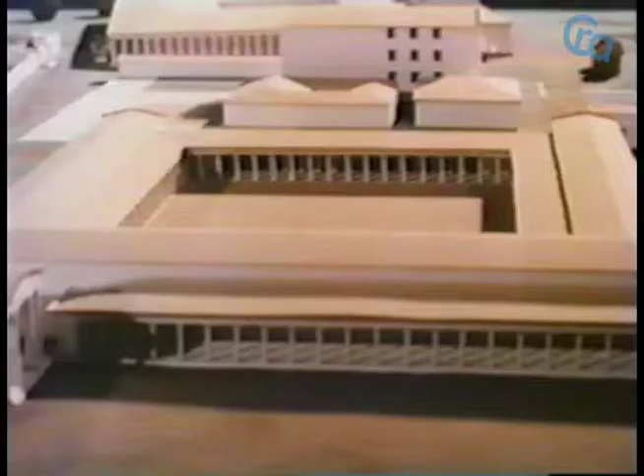But surrounded by the later richly constructed and reconstructed buildings, visitors' lodgings, administrative offices, training quarters for athletes, and the covered tracks of the gymnasium, the marble-roofed temple of Zeus always dominated the scene.

Next to it, with a low-tiled roof, stretched out the ancient, honored temple of Hera. The temple of Zeus is the norm of the Doric form, a model in measurement and all other respects for what was to follow.

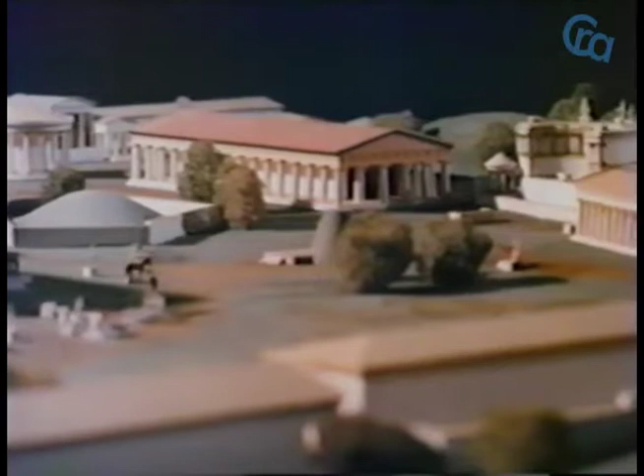The temple of Hera, a century and a half older, had been gradually transformed from a wooden building to one of stone. We must visualize the walls of what is known as the cella, that is, the inner chamber of the temple, as a half-timbered construction fitted with mud brick on a foundation of stone.

Originally, the roof supports and beams were of wood, and so were the columns, only replaced one by one as necessity or tradition demanded by columns of stone. The columns of the Hera temple were about 20 feet high. Those of the Zeus temple near 40.

The platform of the temple, the three great steps leading up to it, the capitals with their supporting slab, the lion-headed water spouts of marble, all speak to us even now with a concentrated power that must have moved the worshippers of that time.

The front of the temple, with its six columns, proclaims classical order. Behind the facade stands the entrance to the cella, the home of the statue of the god, a seated, wood-carved figure covered with ivory and gold, looming 40 feet high, filling the area with majesty.

It ranked as one of the Seven Wonders of the World, although later objections were raised that the god would have lifted the roof off if he had decided to rise from his throne. All that remains is his picture on ancient coins, a truly godlike head.

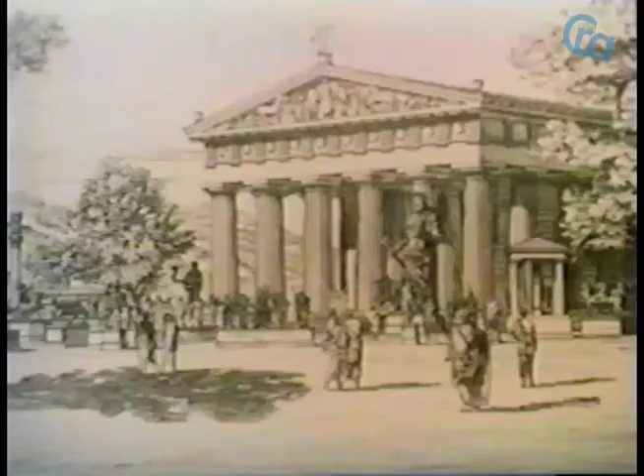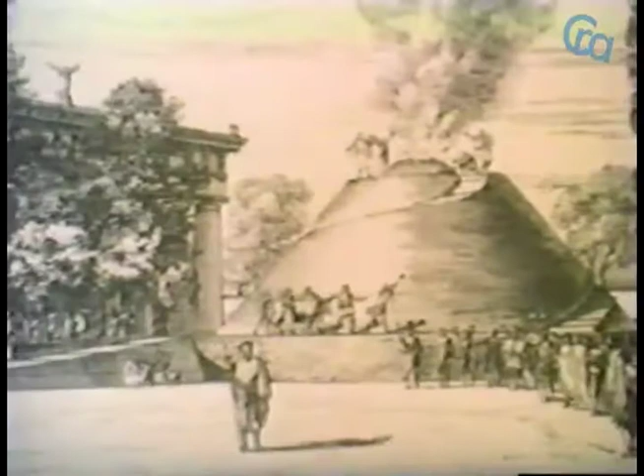There were many other statues in front of the temple. Pausanias busily counted 24 bronze statues of Zeus alone. He tells us also of an altar outside the temple, a mountain created from the ashes of burnt offerings, growing higher and higher through the centuries.

The altar belonged to the temple, but since all sacrificial acts took place under the open sky, the temple itself contained nothing but the shrine of the god.

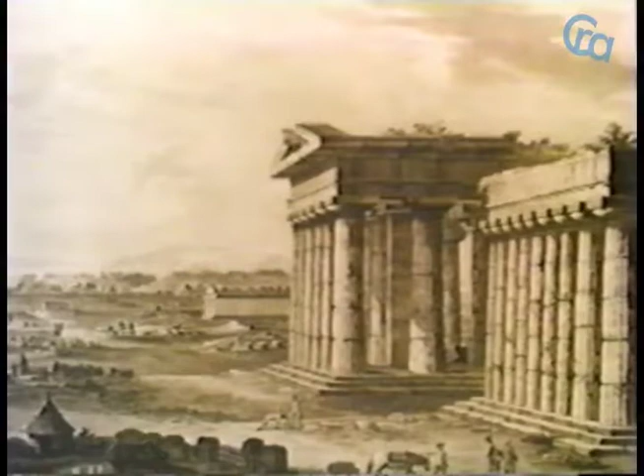Naples, 23rd March, 1787. Goethe wrote in the diary of his Italian journey: "We had been uncertain whether our journey would take us through rocks or ruins, when at last some long rectangular masses we had already noticed from afar revealed themselves as the remains of temples."

For centuries, the temples at Paestum had been lost to all knowledge in a marshy, malaria-infested, scrub-covered coastal plain. They were discovered in the middle of the 18th century when the road to the south was constructed, just at the right time when interest in archaeology was becoming fashionable.

While Goethe's traveling companion, the painter Kniep, immediately took to his sketchbook, Goethe wondered about the ruins. To him, the blunt, thickly set mass of columns appeared terrifying. It took him some time to bring his concept of classicism to terms with what he actually saw.

The romantic awareness of beauty in ruins, the sense of discovery, the enthusiastic copying of Greek art in Goethe's time, or our modern subjective photographic vision, neither can bring us close to what the Greeks saw as they stood before their temples, unless we stand there ourselves, perhaps, leaving preconceptions behind us.

The Temple of Hera in Paestum expresses the Doric temple in its classical development. Its ruins are better preserved than others, and in them we can read the canon of Doric form. Three steps alone, not scaled to the measure of a human stride, form the substructure from which the columns rise.

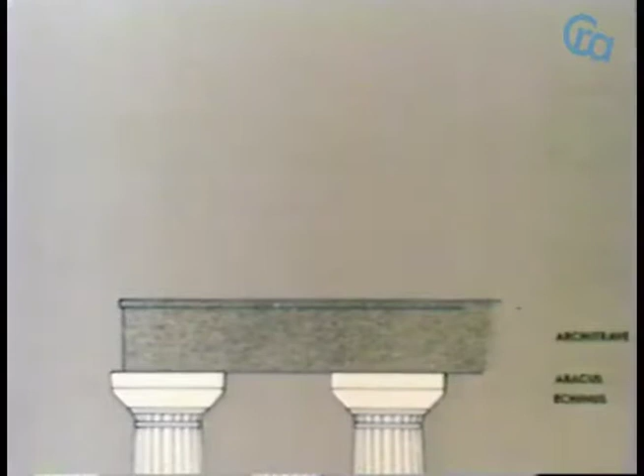Above it, there's a second layer of a row of triglyphs, that is, blocks with triple vertical grooves. One of these is placed centrally above each column, another halfway between. The intervals between the triglyphs form roughly square fields, the metopes. Thus, the interval between two columns is cut in half by the triglyphs, and the rhythm is doubled, and paradoxically shortened.

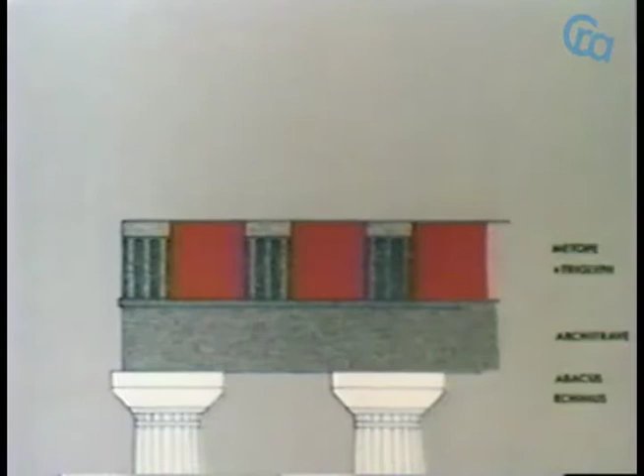The cornice, the projecting ledge of the sloping roof, carries underneath a series of blocks, the mutules, which again have the intervals between column, triglyph, column. Thus, to each interval between the columns below, there are four intervals above. The rhythm is speeded up once again.

These blocks beneath the cornice, the mutules, and the projections underneath the triglyphs are studded with cylindrical pegs, the guttae. They presumably imitate the wooden pegs used in carpentry when temples were built of wood.

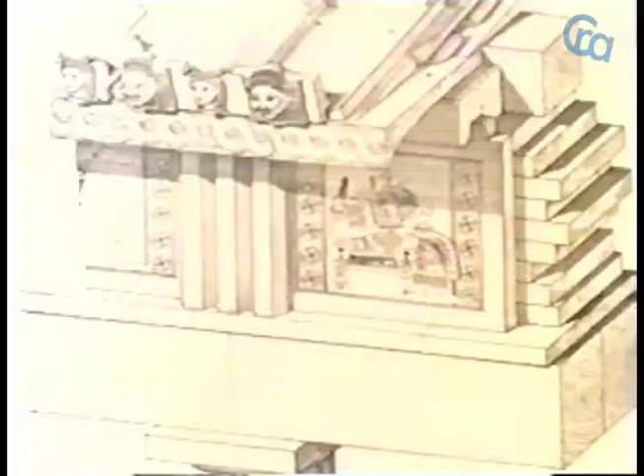Vitruvius, in his book on architecture, derived many details of form in the Greek temple from the earlier constructions of wood. He considers the alternation of triglyph and metope in the Doric temple to be a result of the earlier structure of wooden beams, with gaps or eyes between them. These open eyes were eventually blocked in with panels, the metopes, which carried pictorial decoration, while the beam ends were covered with carved panels, the three-grooved triglyphs.

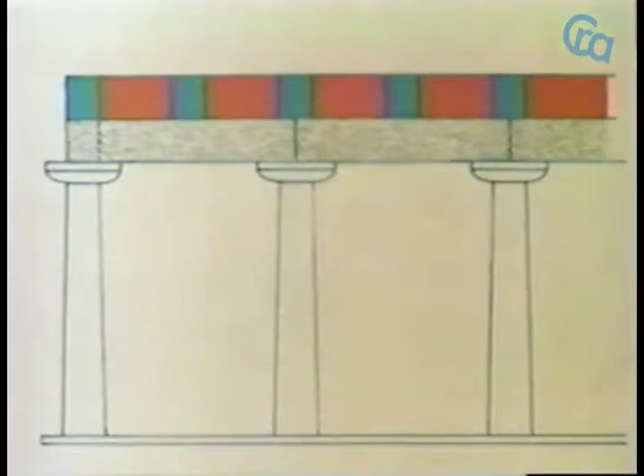When temples came to be built of stone, nothing structural corresponded anymore to triglyph and metope. They became decoration. But this tenacious adherence to traditional form, originally religious in nature, brought with it architectural complications at the corners of the temple. A triglyph had to be set at each corner of the entablature. It offered a visual termination and had been a structural necessity when the temple was made of wood, for the triglyph then marked the head of the beam, coming in at each corner at right angles.

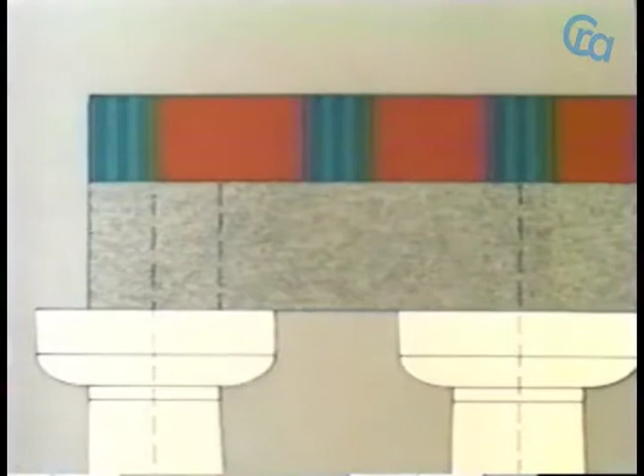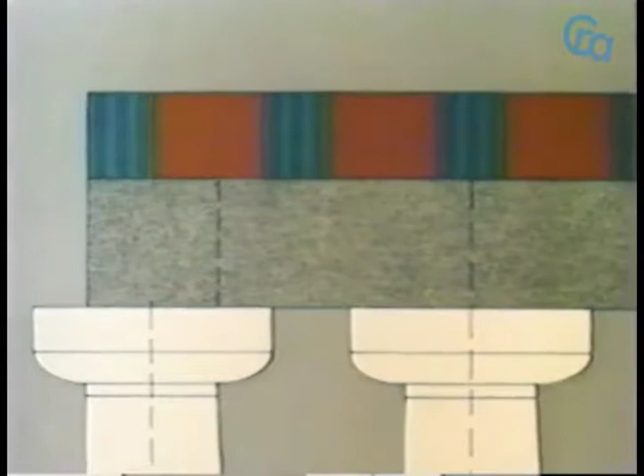But the pattern of horizontal metope and vertical triglyph, when applied to stone, which has a broader construction than wood, left only part of the metope at the corner, a condition which was plainly intolerable and had to be straightened out. This could be done either by making the corner metopes broader, or by shortening the interval between the columns at the corner. There were many possible variations between these extremes, and the problem was solved by each architect in his own way.

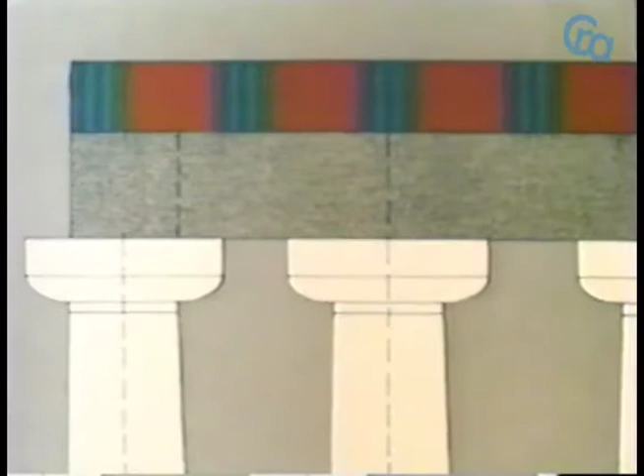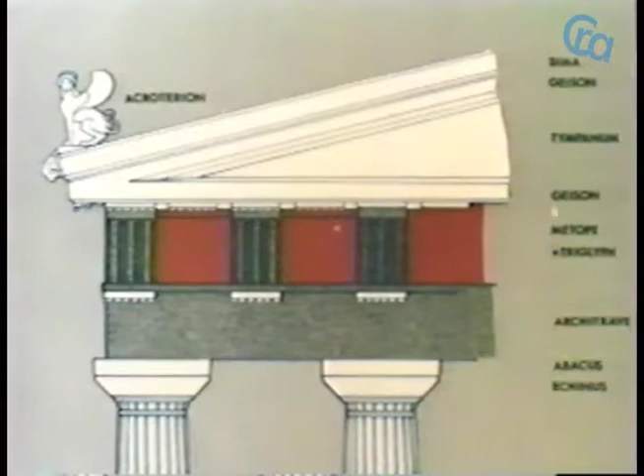The top of the temple consisted of the pediment, its raking cornices, and the guttering or the sima, formerly called the cyma. The Temple of Hera has lost its cyma and also the figural decoration, which explains why the roof seems flat and rather squat. We must think of it as having been luxuriantly ornamented, as a crown to the whole building. The vertical open screen of the colonnade is contained between the strong horizontal lines of substructure below and entablature above.

At Paestum, as at Olympia, next to the developed classical temple, an earlier one stands, or rather sprawls, with 18 columns at the side and 9 in the front. Even if, in our imagination, we restored the cella, the inner chamber of the temple whose stone blocks were stolen and used for other neighboring buildings, there remains with us an impression of spreading heaviness, a lack of concentrated tension.

The ancestors of these columns were tree trunks. It's easy to believe that from a distance they appear quite slender, but under their immediate shadow we sense a brooding massiveness. The column shaft stands on a broad surface. Under the load of the superstructure, it swells like a muscled arm. The curve of the capital appears to bulge between the column shaft below and the square abacus above. The heavy burden is drastically, naively evident.

The decorative border between shaft and capital is carved with incredible delicacy compared to the brute force expressed by the columns, a bracelet with ever-changing ornamentation.

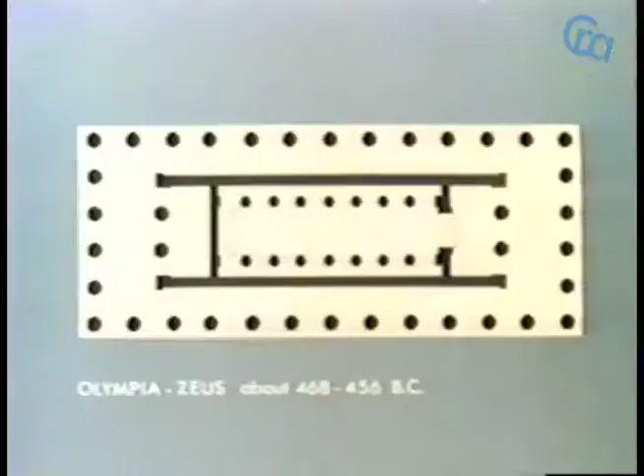A series of carved rings is the only decoration of the classic Doric capital. The columns are now so closely set against each other that the abaci practically touch and give the illusion of a continuous wall. The Temple of Zeus at Olympia is structured according to the classic plan, in harmonious design, visible from all sides, each dimension in proportion to all others. The ground plan is basically that of the Hera Temple at Paestum, and the architectural variables are naturally similar.

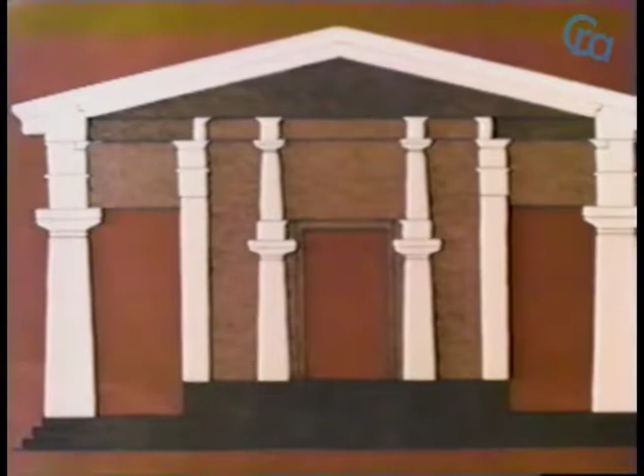The Doric column, for example, cannot be arbitrarily stretched or shortened. The colonnade of the cella must therefore be constructed in two stories. The two rows of columns are erected in proportion to each other in size and in the number of flutes, the lower colonnade twenty, the upper sixteen, so that the upper colonnade naturally continues the tapering of the lower one without losing its entasis, that is, the gentle swelling of the shaft, which gives individual movement to each column.

Horizontal forms in the classic temples always show a subtle swelling. The verticals incline inward. The tension created by these tiny deviations from the straight line, giving life and movement to the whole building, is hardly visible to the eye. Measurement alone proves its existence.

The transition from the archaic to the classic temple can be compared to contemporary development in Greek sculpture. We can see that this archaic boy has his weight naively, rigidly poised on both legs. The later classic concept is counterpoise. The hips tilt up to the downturned shoulders, an interplay of movement and counter-movement, giving to the body, calm and relaxed to all outward appearance, an inner tension communicating itself to every limb.

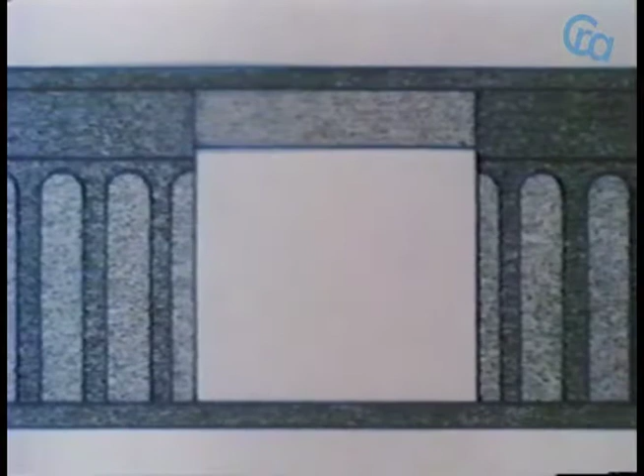The pediment had no observable function as a load carrier, nor had the metopes between the triglyphs. They were just panels covering an empty space, and they were used in Doric architecture for pictorial decoration. The earliest temples had painted metopes of fired terracotta.

A plaque from the Apollo temple at Thermos shows Perseus, who had slain the Gorgon Medusa and is running away from her sisters. He has hidden the Gorgon's head in a satchel to escape its dreaded gaze. The artist chose it peeping out.

The earliest metopes of stone are found on archaic buildings in Selinus and Paestum in the middle of the 6th century BC. The metope, like the triangular space of the pediment, presents a challenge to the artist. Here, Europa is carried off by the bull. The scene has to fit the rectangular, almost square frame and fill it.

The deeds of Hercules and other heroes are well suited for a sequence of metopes. Hercules seizes the tripod of the Delphic priestess. Each story is complete in itself. Hercules brings the Erymanthian boar to King Eurystheus. The king hides in the Pythos, a storage vat.

Hercules versus the giant Antaios. The Cercopes were twin pygmies, well-known cheats and swindlers. Hercules caught them disguised as bluebottles, spoiling his sleep. He hung them like meat from a pole. We meet this story in Paestum and a little later in Selinus. The twins, seeing Hercules from an unusual viewpoint, make indelicate jokes about his hairy bottom. Hercules laughs and lets them go, demonstrating a sense of humor not usually attributed to him.

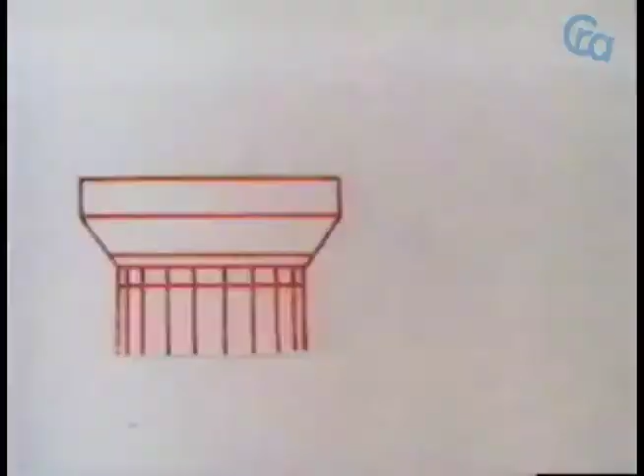Compare the Doric and the Ionic capital. The difference between them is profound, underlined by their different geographical location. Yet both temple styles derive from the same background, at the same point of time.

Only Didyma, the most famous oracular shrine of Apollo, second only to Delphi, can give us some conception of the gigantic temples so characteristic of Ionic building in Asia Minor. Now we have only the ruins of the rebuilt temple, constructed at the time of Alexander the Great on the foundations and after the plan of the earlier one which had been destroyed by the Persians. The double colonnade of 120 columns is surrounded by a walled precinct which contained the cult chamber of Apollo, as well as the sacred spring and laurel grove under the open sky.

The proportions of the Ionic temples aim at the gigantic, but also at the light and lofty. The columns of Didyma are over 60 feet high with a diameter of 6 feet at the lower level. By contrast, the columns of the Doric temple of Hera at Paestum were barely 30 feet high, yet had a lower diameter of more than 6 feet. The whole elevation, column, and entablature of Hera's Paestum temple could have been accommodated within the great entrance portal at Didyma.

There is no pediment at Didyma. Perhaps none had ever been planned. No triglyphs and metopes, and therefore no angle conflict. Slender columns soar effortlessly, carrying the light entablature. The continuous frieze of carved ornament above the architrave echoes the carved column bases below. Work on this later temple of Didyma was continued over 5 centuries, from Alexander the Great down to the reign of the Emperor Hadrian. It was never finished.

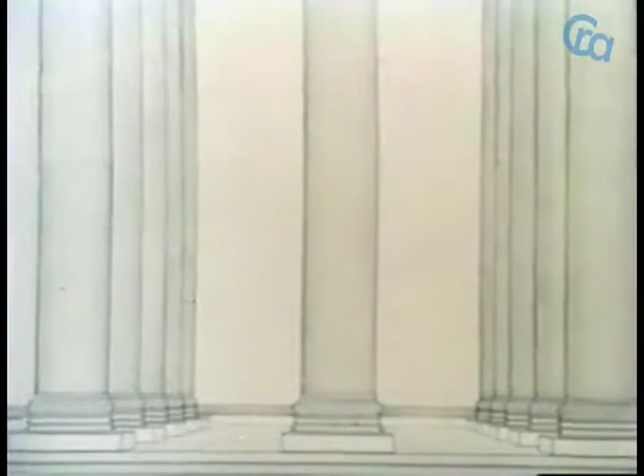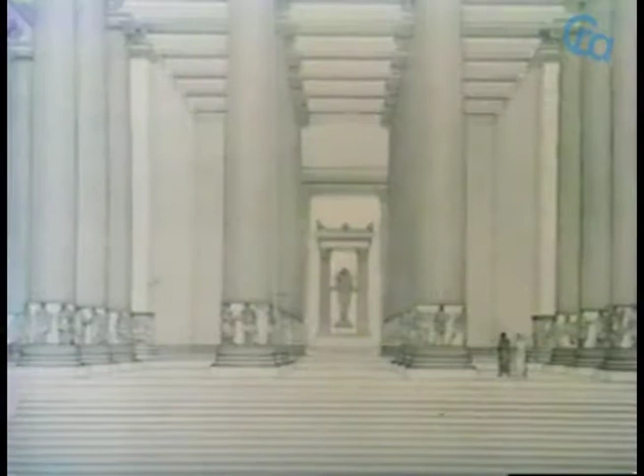The Temple of Artemis at Ephesus has left us a few remains and a description or two from ancient writers. Again, there was an earlier temple, burnt down by Herostratus, and a successor to replace it of the same plan and dimensions. Pliny, counting as usual, listed 127 columns and noted that the marble was bluish. Of deeper import, far back in holy isolation under the open sky, great Artemis stood. A later copy gives us an idea of the famous goddess, mistress of the animals, calm-eyed and many-breasted, with a rich mouth. She had her hands then. What was it she held in them, this nurturer of men?

The Doric Temple of Zeus at Olympia. The Ionic Temple of Artemis. Its area is greater than that of the biggest Gothic cathedral in Europe. The cella was uncovered.

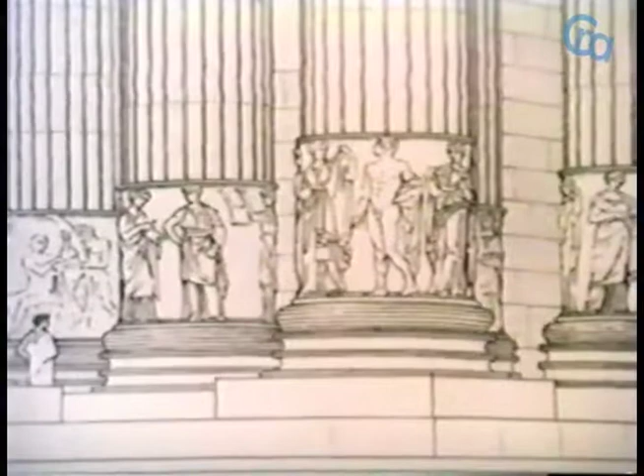The Ionic Temple confined its sculpture to two places, one just above the column base, where no Doric architect would ever have put it, because there it denied the function of the column as a constructional element. Here is such a piece, life-size relief figures from the Temple of Artemis at Ephesus of the later classical period, now in the British Museum in London. A woman between Hermes, messenger of the gods, and death personified in Thanatos, youth with sword and huge eagle's wings.

The other spot for sculpture in the Ionic Temple was the frieze above the architrave. Not many such friezes have survived. One of them that has is archaic, about 20 inches high, from a treasure house in Delphi. Uninterrupted by triglyphs, unconfined by the frame of a metope, a band of relief sculpture glows continuously with the battle of the gods against the giants.

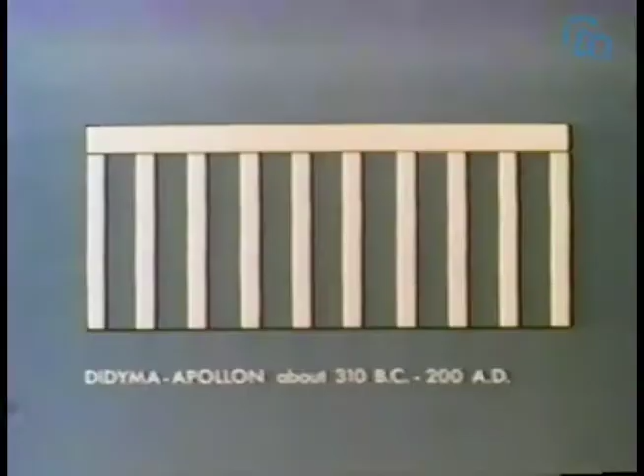The Ionic Temple of Apollo at Didyma boasted columns 65 feet high with a lower diameter of 6 feet. Temple G at Selinus was 54 feet high with a lower diameter of 11 feet. The aim of the builders was to achieve the Ionic measure and surpass it.

The columns of Temple G were blocked out when they were quarried, 7 miles from the city. Here we can study in detail one of the many technical methods practiced in antiquity. A narrow channel, some 25 to 30 inches broad, was drilled and chiseled into the living limestone.

The column drum was thus blocked out, with the tapering of the column taken into account. The drum is over 12 feet high, with a circumference of 36 feet. Later, the drum was disengaged and removed on wooden rollers from the quarry.

These columns were, in proportion of height to circumference, the most enormous ever to have been built into a Greek temple. But some of these columns were not even fluted, and because we know that flutes were usually cut only at the final stage, when the column was already standing, we also know that the project was never finished.

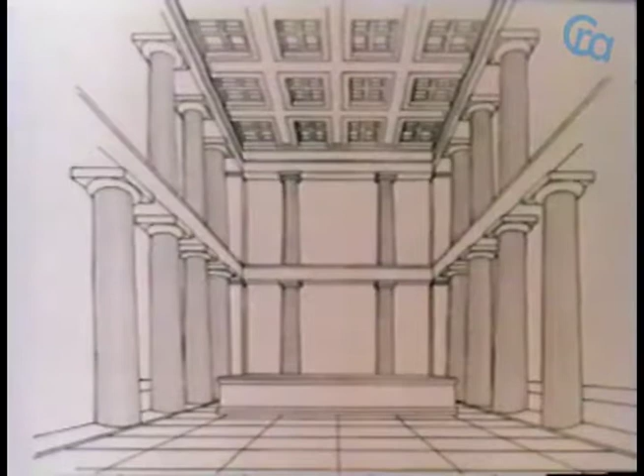The color and light effects in that room cannot be told, only implied, only imagined.

In buildings on the Acropolis, the Propylaea, the Nike Temple, the Erechtheion, we can see the synthesis of the Ionic and Doric spirits in the age of Pericles, where the two great architectural forms stand side by side. It's not the gigantic measurement, but the elegance of the Ionic style, the slim, high-reaching, decorative game matched to Doric sternness.

In this partnership, the Parthenon appears as the last refined perfection of the Doric style. Tension that lies in rejection of straight lines fills the entire building.

The vertical leans inward, measurably, should the eye think it is deceived. The perspective of the tightly knit colonnade is emphasized at the corners.